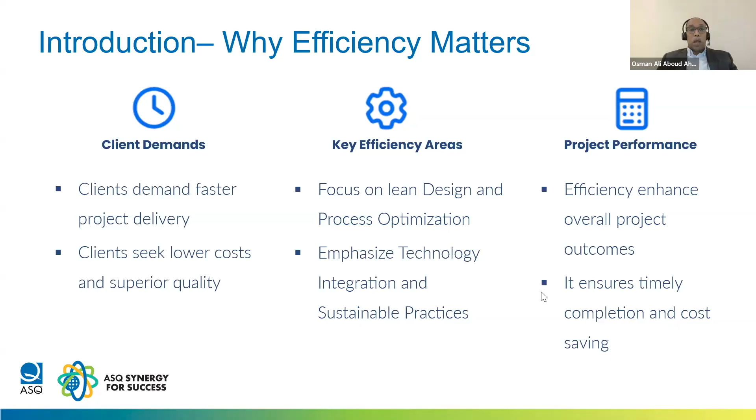In design and construction there are many challenges. I've picked 4 of the main ones particularly faced here in our region. The first challenge is fragmentation - this includes all processes, geographical organization, and organizational-wise team. All this fragmentation is dragging back completion of projects in design and construction on time and within budget.

The other challenge is communication issues - siloed communication, lack of an integrated system, culture, let's say even language, different culture. All these have an impact on the right way of communication between different stakeholders.

Another challenge is scope creep, which is a phenomenon here in the region - most of the time scope changes, or unclear or incomplete scope, uncontrolled change, ineffective stakeholder communication. All these issues and challenges we are facing before and now, even heavily.

Another challenge is material waste associated with design and construction - heavily wasted material due to improper design, which is inherited from the design phase. If the design is inappropriate in terms of material, this carries through the whole process until construction. It's also associated with other challenges like improper storage and handling on site. So to overcome these challenges, we'll see how best practices can address and overcome them.

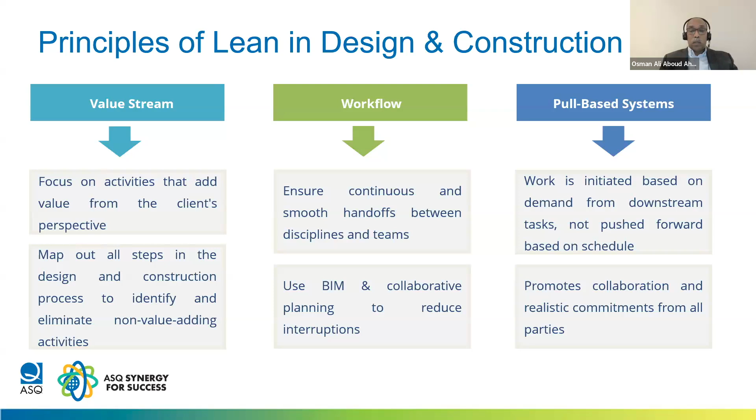The best practice of lean design process optimization. As a definition, this is an approach or systematic approach to eliminate waste in design processes.

As we said before, mapping the whole process using different tools, value stream mapping or FMEA or other tools, to eliminate non-value-adding steps. It is also focused on delivering value and coordination between different design teams, especially in mega projects.

Usually different design teams are working together, and sometimes they are not located in one area. Sometimes from Japan to US to Europe to Middle East and so on. So coordination between them through the lean design process optimization is very essential.

As objectives of process optimization, the first one is to streamline the design workflow by utilizing different tools, and by minimizing rework. Using BIM is an effective tool to minimize rework, especially in the design phase, and by improving collaboration between different disciplines, which is very essential.

As strategies to implement lean design and process optimization, first of all we have to set-based design by exploring multiple solutions. Nowadays AI can be used to explore different solutions and get the optimum one from that solution, which comes up with the need of the stakeholder and client.

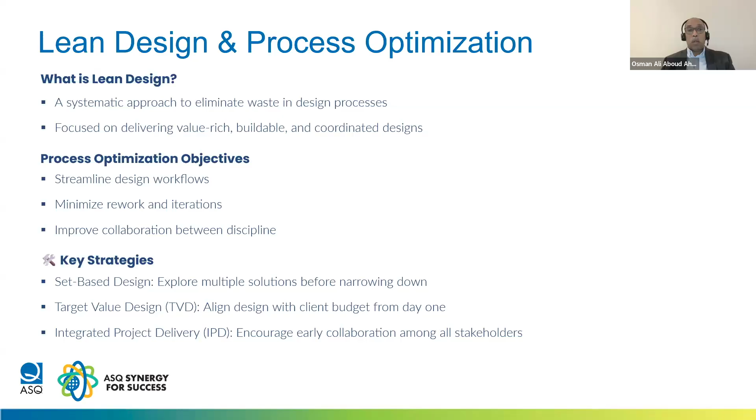And also by using a tool like IPD, Integrated Project Delivery, which encourages the collaboration among all stakeholders. We'll see it even later on in detail how it is materialized.

There is a benefit here for adopting lean in design and process optimization. The first one is time saving - this is reduced design and construction time for sure, this is evident, which is in place now. Control of changes, especially in design, and efficiency of quality has been improved a lot actually, and satisfaction of stakeholders also has been improved when implementing this best practice.

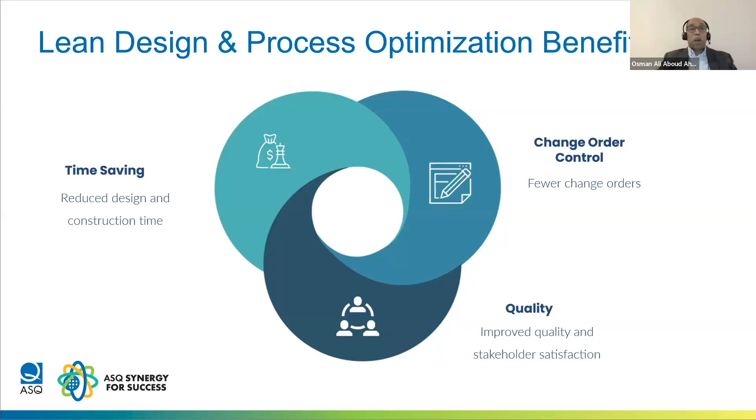Here we have a case study in Saudi Arabia. This is a 200-bed care facility hospital that has been completed using lean tools and best practice. For such a project, many challenges are there due to the complexity of design and construction as well. We summarize it here.

The challenges facing us before using the lean tool and best practice - first of all, frequent design changes, which is a phenomenon here in the region. Most of the time, design is keep changing, which affects the design phase and construction as well.

And also delay risk due to the misalignment between teams, meaning collaboration at minimum. And also excessive time in coordination and meetings. In addition to high material waste, as I mentioned before, due to last-minute design changing and other factors. Design clashes and rework, which is also a phenomenon.

When we use the lean tools and practice, first of all we use the voice of customer to capture all stakeholder and client needs and expectations. And this has been embedded as design input from day one.

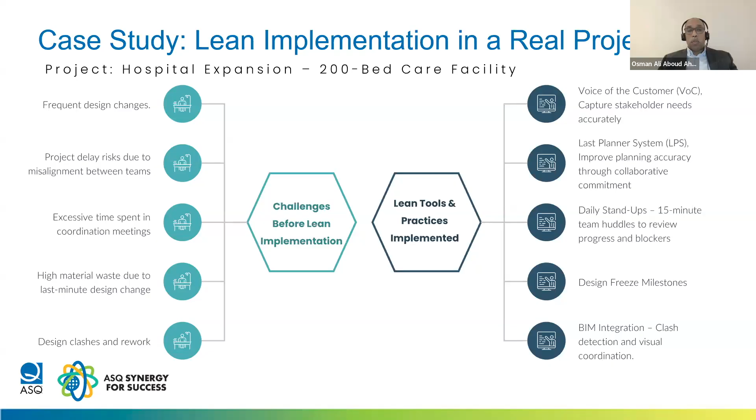And instead of lengthy meetings, we used to have a daily just 15-minute meeting in the war room. We used to have design freeze milestones. So we minimize the design changes, and also utilizing BIM minimizes the clashes and detects issues as early as possible. Besides that, this fosters collaboration between different teams.

As we are talking about the integrated project delivery, we should have some definition. It's a holistic approach which integrates all people, systems, and best practices in one process. That means this fosters collaboration, reduces waste, optimizing efficiencies through the whole project from initiation up to the end.

And in the core principles of this IPD, we can find the early involvement of key participants, which is very essential. From day one, all party stakeholders are all at the same page.

Also, by using the integrated project delivery, this fosters mutual respect and trust culture among all teams. In terms of risk management, this is shared risk and reward, which enhances the morale of the team. At the heart of that, they jointly develop and validate the project goal and share it with all the stakeholders, so they are all working towards one goal.

Also, as a key principle, the integrated multidisciplinary team during the design phase as well as construction, and optimizing the project outcomes through the usage of IPD. And the helpful tool, the BIM, we'll see later how it is helpful and essential to meet the client requirement.

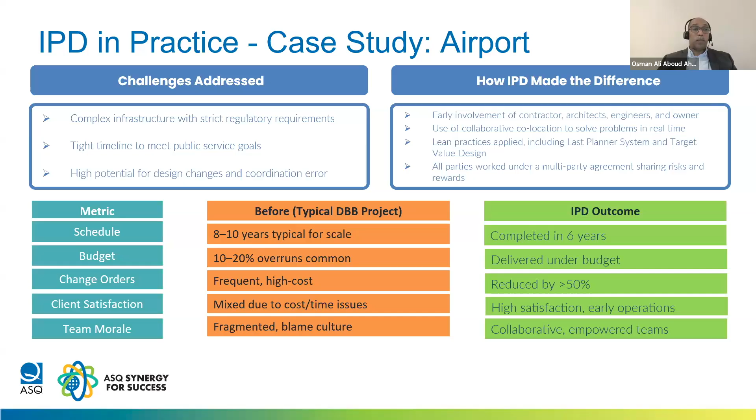So here there is some technology integration in use nowadays, which is essential for the project to be completed on time and within budget. Using BIM, the building information modeling, as we said, has many benefits. Using cloud tools, I cannot imagine nowadays a design and construction project without the cloud, which helps different stakeholders and entities share tools and information together. And also document management system tools, which enhance control over documents. We use Procore, Aconex, and other tools.

So this is the benefit of technology integration, at least for BIM and cloud benefits. In BIM, this enhances collaboration, as we said, by fostering a collaborative attitude among different teams, detecting clashes at an early stage, and reducing error by using digital representation. This also benefits the construction phase by helping the contractor make optimum shop drawings, in terms of time and quality.

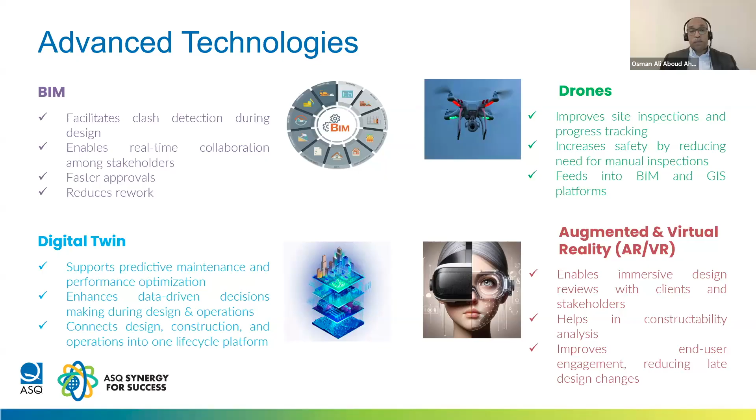In terms of digital collaboration tools, as we said, we use platforms and clouds, which are very helpful and no doubt add value to all projects. By using Aconex or Procore or Teams, we enhance collaboration between different teams, and also put document management control in place. By using the cloud, this also enables sharing and accessing information between different parties.

Let's come here to the common risks in design and construction. For sure, risk varies between projects, from project to project, from location to another, due to the scope and other factors. But from experience, I picked the main design risks, and maybe this can be typical to other projects in other areas of the world.

In terms of design risk, as we said before, typically this is incomplete or inaccurate design documents, frequent design changes, non-compliance with code or regulation from client and stakeholders, and also lack of coordination between different disciplines, especially in the design phase.

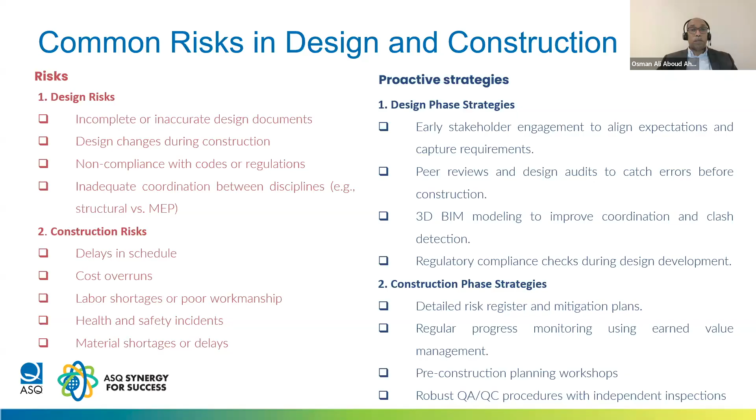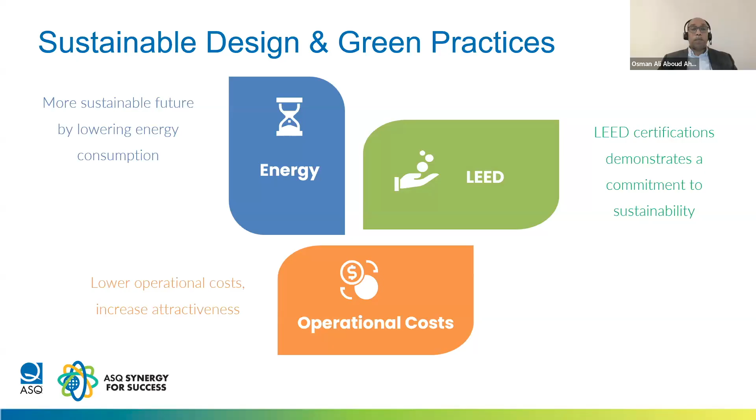Sustainable design and green practice has many benefits. As a sustainable design, incorporating this in design principle minimizes the environmental impact, for sure, which is evident. This practice enhances overall quality of construction and projects. It also enhances energy efficiency by utilizing energy efficient material and reducing operation cost, contributing to a sustainable future by lowering energy consumption. As we discussed, LEED certification is a demonstration of commitment to sustainability.

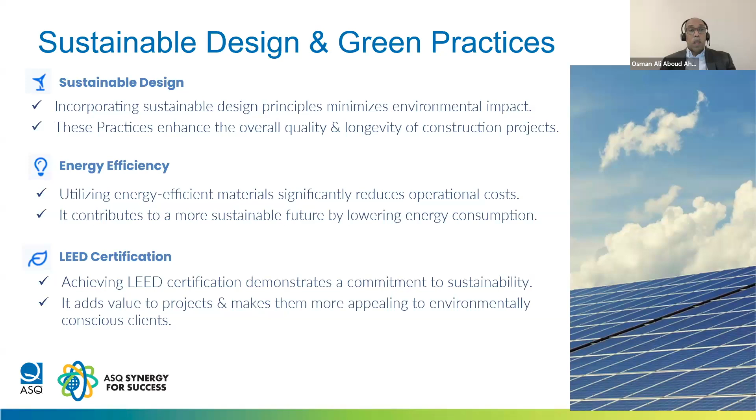Here we have picked sustainable design and sustainable material, two for both design and material. In design, nowadays natural lighting is heavily used instead of artificial lighting, which lowers energy consumption, and also the use of green roofs. These vegetation roofs provide thermal insulation, reduce storm water, and extend the life of the roof.

In terms of sustainable material, we use recycled steel and recycled aggregate, which have a huge impact in reducing carbon emissions. As we know, construction emits a lot of gases into the environment, and this also reduces the usage of natural resources, lowering the cost. However, in recycled aggregates there are some issues which are evident now, especially in mass concrete, where some chemical issues have arisen - how the cement and other materials react with the recycled aggregate. But ultimately, the overall benefit is evident.

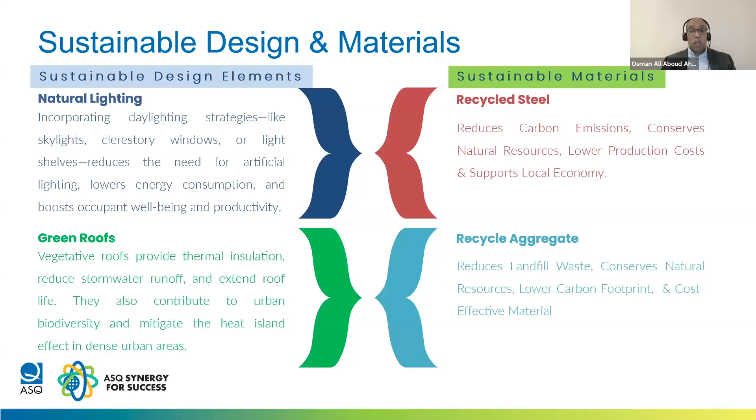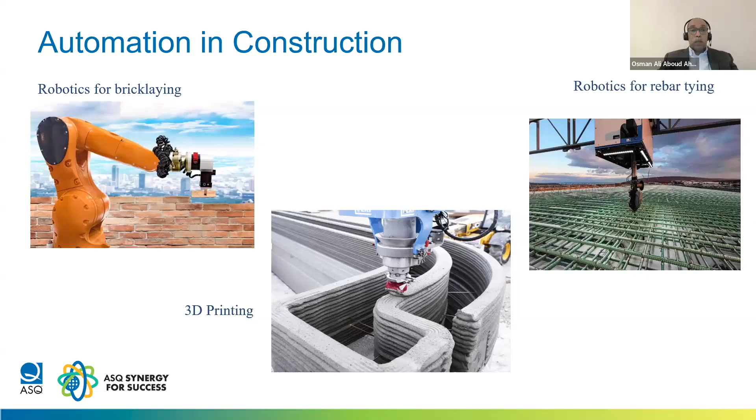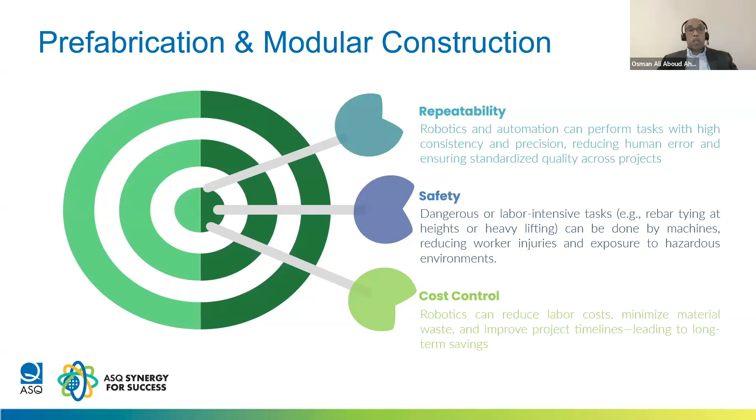Other best practices are prefabrication and modular construction, which have many benefits, especially using robotic automation. This makes it consistent and precise, and reduces cost. In terms of safety, this has a huge impact, especially in confined spaces and high-rise buildings, using robotics and other construction tools. This minimizes risk, safety issues, and injuries. In terms of cost control, this also enhances and minimizes material waste due to the usage of prefabrication and modular construction.

Automation and prefabrication have another benefit, which we can summarize here: it reduces construction time, which is evident. It lowers labor cost, improves the ultimate quality of off-site assembly - this is especially impactful in construction by using precast. It also streamlines the processes, with automation for repetitive tasks increasing overall productivity.

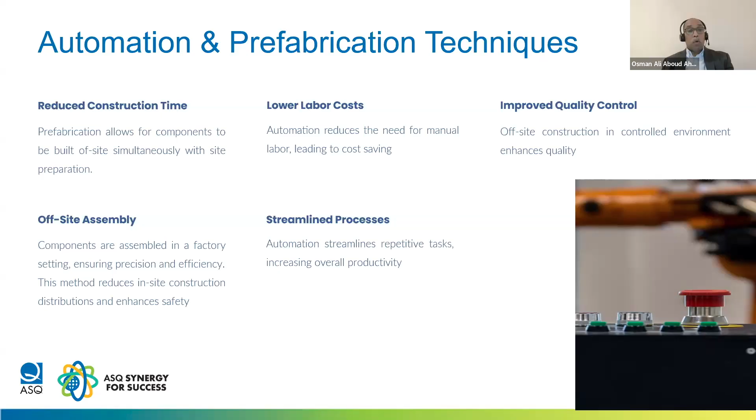By this, I have to conclude and wrap up the session. We talked about lean principles and how to implement them, the collaboration approach using BIM and other tools, technology integration, risk management - identifying risk and mitigation plans that should be in place - and the usage of best practices for sustainable practice. Thank you for all, and you are welcome if you have any questions. Thank you.